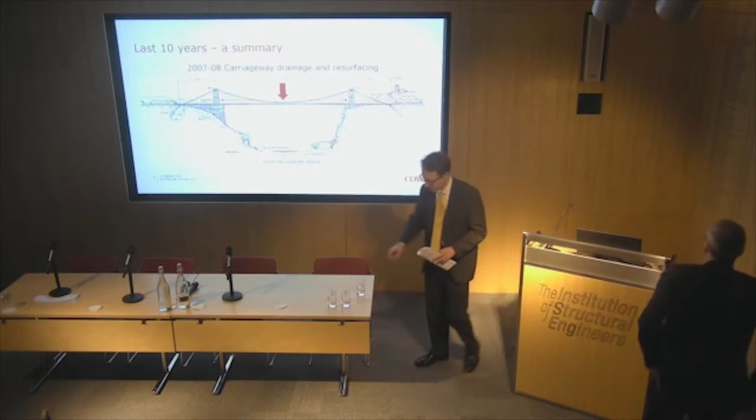Good evening. As John mentioned, there's probably many things I could talk about on this bridge because I've been involved with it for just over 10 years now. But the presentation tonight is going to focus on some of the bigger planned maintenance projects that have taken place on the structure in the last 10 years.

The first one I want to introduce is carriageway drainage and resurfacing, and that was done on site in 2008.

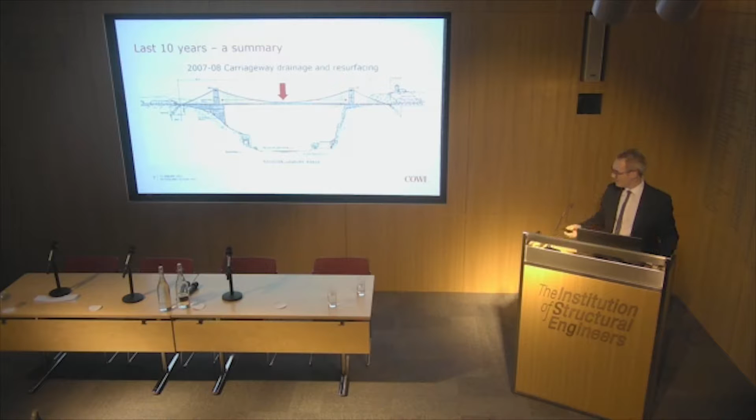But before I delve into the detail, I just want to give you a quick introduction to the deck. This is a cross-section of the bridge deck, so you're familiar with some of the terms I'll be referring to.

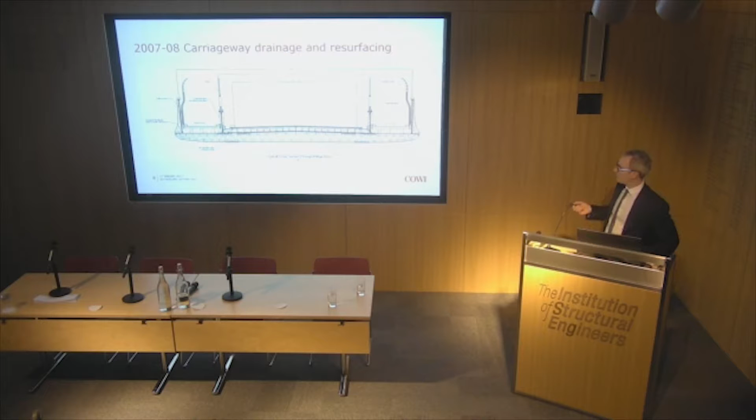Here you can see the vertical hangers, I'll try and point them out. They're connected at their upper end to the main chains, and at their lower end to the top of the longitudinal girders, and there are 2 of them there. The lower end of the longitudinal girder is bolted to this lattice cross girder, and on the outer edges of the cross girder you can see these lattice parapet girders, which have cast iron stanchions here to provide some lateral restraint.

Now the carriageway deck is made up of 5-inch thick Douglas fir timbers which span longitudinally, and on top of that you have 2-inch thick Douglas fir planks nailed in a transverse direction. The carriageway running surface is a mastic asphalt consisting of a paving layer on top of a thin waterproofing layer. The vast majority of all the structural elements on the bridge are still the original wrought iron, although some hangers and connector plates have been replaced in steel over the last few decades.

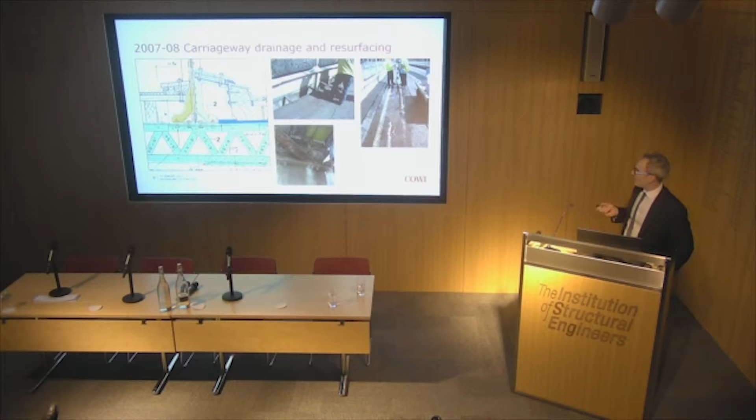So the main focus of this project was to either repair or replace some of the badly corroded sections, also to replace that curb and splashboard detail with a more waterproof or watertight alternative, and also to renew all the surfacing on the carriageway.

The photographs here show some of the metalwork repairs in progress. I want to point out this - this is where the plan bracing comes in and connects to the cross girder. What has been removed here is the connection plate that attaches and connects the cross bracing.

We were replacing that because we could see there was significant corrosion at the top of it - it lost probably 50% of its cross section. When we removed the plate, we discovered there was actually a significant amount of corrosion to the underside as well, because dirt was getting trapped in the voids underneath the plate and was causing it to corrode from underneath. That was probably another 25% section loss, so the plate was very thin in places.

They were all replaced, but that did trigger the question: is this happening somewhere else? Is there corrosion happening to surfaces which are hidden from view? So that's something we have kept in mind. There are similar details on the bridge, but most of them, pretty much all of them, are not exposed to this level of irregular wetting.

Put up these photographs just to give you a bit more of a view into the construction of the deck. This is where we reconstructed the bridge deck at both ends where the movement joints are positioned, because of the rot and corrosion I mentioned. You can see the main timbers there and the plan bracing. That's the underbridge gantry underneath, which provided a very useful platform for the works, and you can see the men installing the new timbers.

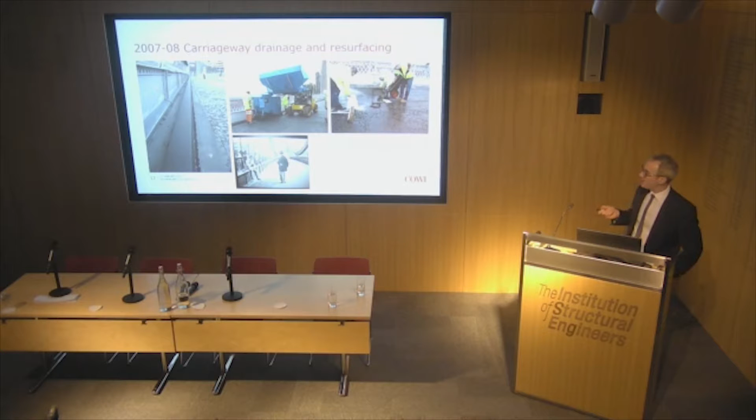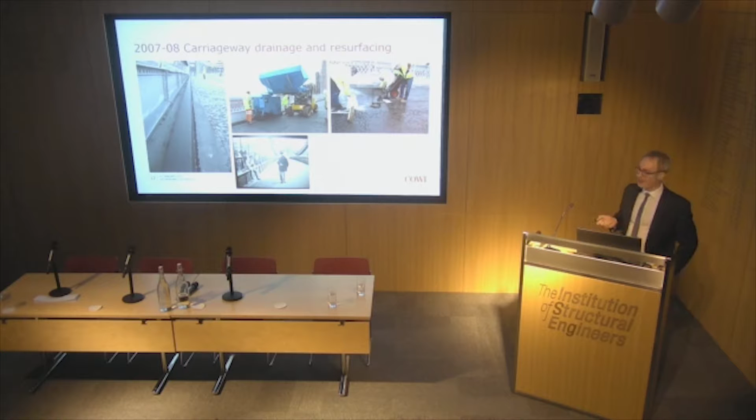This photograph shows the final detail. It's nothing overwhelming, but it's a linear drainage channel that runs the full length of the bridge. There are openings in the curb which allow water to drain from the carriageway into the channel, and this overhang, bonded to the web, diverts any spray from the carriageway. We've hopefully created a relatively watertight detail which protects and preserves the wrought iron below. The detail is actually very similar to what was installed when the bridge first opened, except they had a copper drainage channel — we've put in a glass fibre composite instead.

Just wanted to point this out — I find this a bit of an amusing photograph, just the scale of the bucket and the JCB telehandler. The reason is the 4-ton weight restriction on the bridge. Usually that telehandler would be a 22-ton version, but this one is a 4-ton version, carrying a partially filled bucket to feed the hopper laying the extruded asphalt curb. By coming up with that arrangement with the contractor, we managed to comply with weight restrictions.

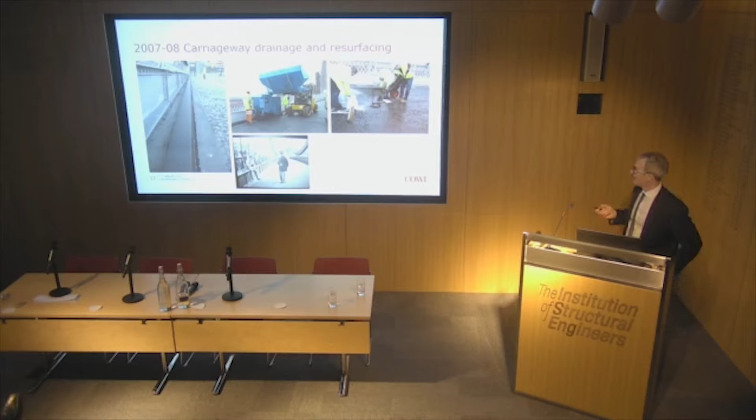So now that we had improved the waterproofing of the bridge deck, we were able to move on to some of the underdeck painting — of all the cross girders, plan bracings, and some of the parapet girders — which commenced last year. As part of that work we are raising the footpaths. They're lifted in 16-foot sections and put onto temporary supports, doing half the bridge at a time so only one footpath is closed to the public. That started last year on one half and will continue this year on the second half.

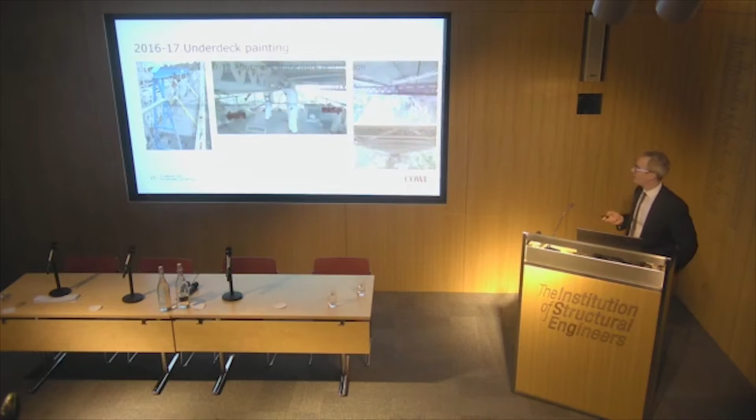The next few projects involve a lot of masonry, and there is a lot of masonry on Clifton — you can't help but notice it, it's quite imposing. That's the abutments, made of red sandstone, and the towers, largely pennant stone with some Bath stone plinths and pillars at the top, which support the cast iron parapets.

This started in 2010, phased over 3 years. The phasing was largely to put it into manageable chunks — there's a lot of masonry to cover, and we were looking to involve specialist masonry conservationists. It was broken into manageable chunks of just over 1,000 meters squared per annum.

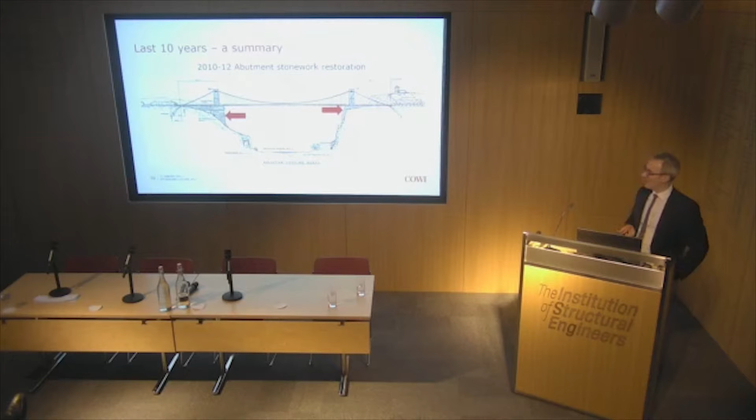The main driver was that significant maintenance of the abutments and towers hadn't been undertaken for quite a few decades, and inspections had identified areas that needed attention that couldn't really be put off much longer. Also, the last time major repointing works were done, they used cement mortars throughout, which started to have an impact on the softer red sandstone.

Of course, the bridge, being in its perched elevation, isn't the easiest to access — there was no ground-bearing scaffolding here. So it was a combination of cantilevered scaffolding from the footways, not so much that it impeded pedestrian flow across the bridge, and gallows brackets made up and secured to the abutment, from which the scaffolding could be constructed. In this photo, the gallows brackets are about this level, so you can see that much above and that much below hung from it, all installed with rope access technicians. It's a very substantial part of the works.

I should just acknowledge the involvement of Ferguson Mann Architects, who are the specialist conservation consultant. They're based in Bristol and have had an involvement with the bridge dating back quite a few years.

Much of the stonework conservation was what you'd expect: high pressure steam cleaning, removal of thousands of meters of cement pointing and repointing with lime mortars, all approved under heritage approval, and removal of large calcite build-up. This is a mason putting a tool finish to a masonry block which was going to replace something similar, though it mightn't be that actual location.

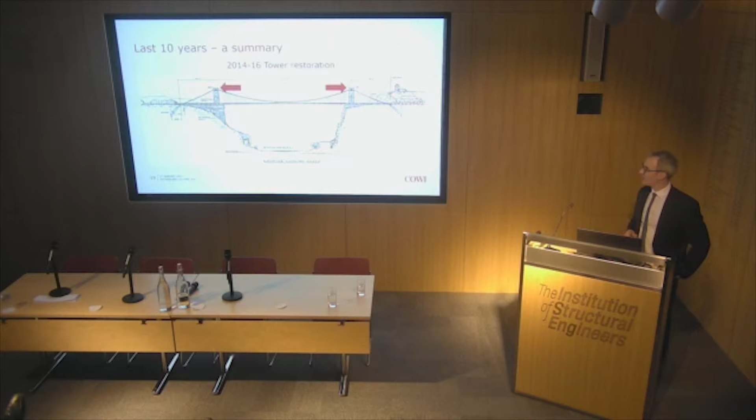The refurbishment also involved repainting of the cast iron parapets, which are very distinct to the bridge. There was quite a bit of refurbishment to the drainage system in the tower, a lot of access improvements, and waterproofing to platforms. All of that was done to the towers.

Just one item I wanted to talk a little more about on the towers: the Bath stone pillars, which you can see towards the top of the tower, support the cast iron parapets at the top. You can see the writing there, which is very prominent when you view the bridge.

These Bath stone pillars suffered a lot in terms of cracking, and we found records dating back to 1920 reporting the same problems - joints opening up, cracks appearing, and they were sending people up to repoint. We did some investigations and concluded it was corrosion of the embedded ironwork that was the cause, very obvious. This is one of the culprits we removed during the works, and we installed an impressed current cathodic protection system, designed and installed by Rowan Technologies.

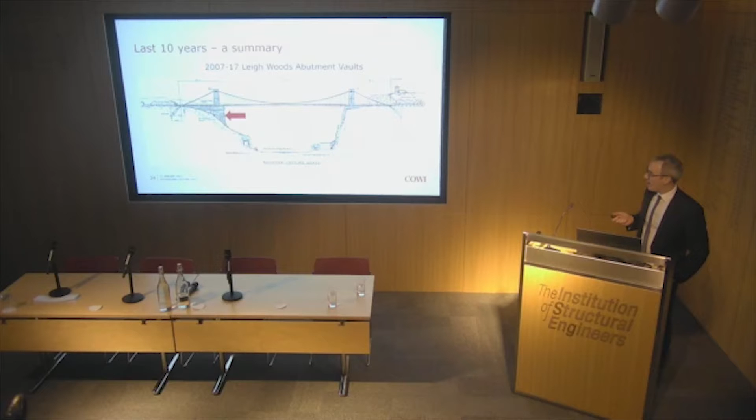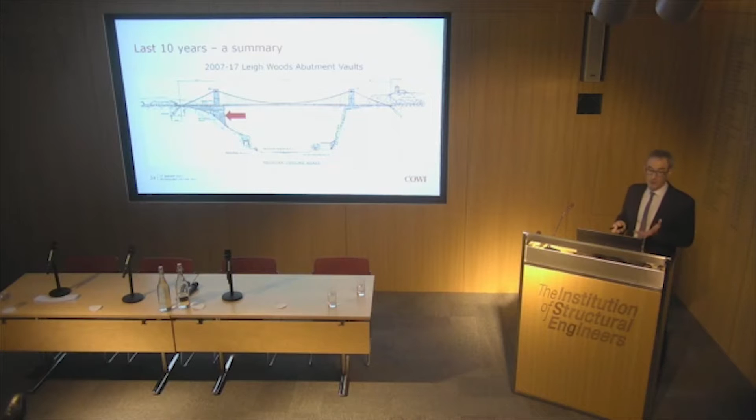In 2001 the Trust commissioned a number of core drillings through the abutment structure, and also a significant amount of ground penetrating radar, to try and establish the makeup of the Leigh Woods abutment, because there are no record drawings - nothing exists of this abutment. They finished in 2001 and concluded, quite unfortunately, that it was solid.

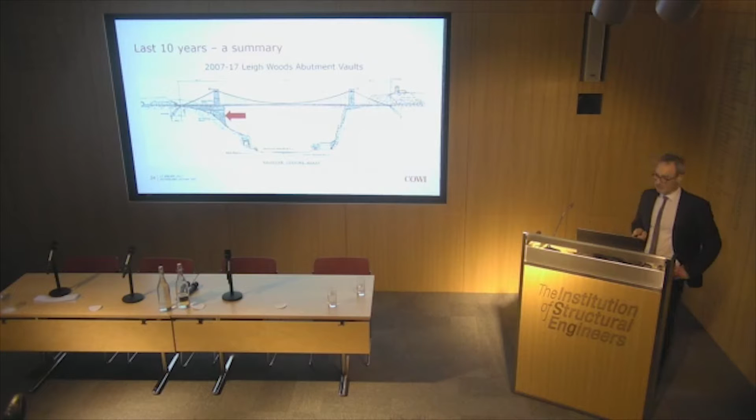Now the ink had barely dried on the report when the Trust were also doing some repaving work at the footway level around the base of the tower and discovered quite a deep vertical shaft. What followed from there was an abutment full of voids.

You can see in the sketch here there are 12 vaults, 7 in the upper level, 5 in the lower level. I acknowledge Bill Harvey's involvement in this - he has been involved in inspection of all the vaults since access has been provided. Providing access has actually been the focus primarily for the last 10 years, because it's still difficult access.

A door has been installed in this position, but many of the vaults are still confined space entry. It was only in the last year that access to these four lower corner vaults was achieved, using a technique of vacuum excavation which managed to clear all the rubble that the construction team decided to dump into the tunnels linking into a lot of those lower shafts. It was finally cleared, making way for Bill and his son Hamish to crawl through the tunnels and carry out an inspection, which they've only just done in recent months.

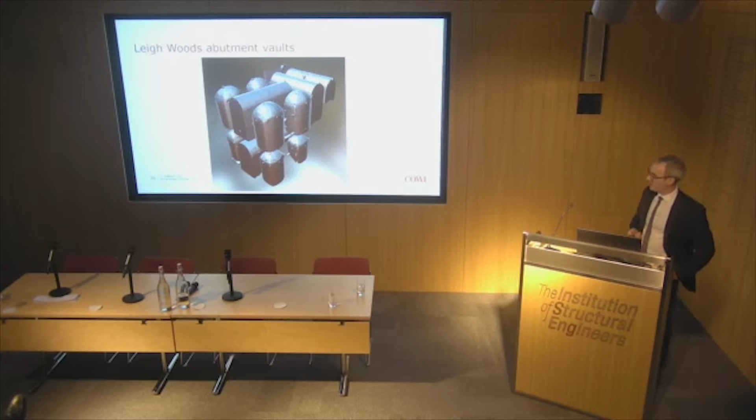They also undertook a point cloud survey, so now we've got very detailed information about the makeup of the vaults, as well as a lot of photographic information that assists with the assessments. No doubt Bill will give more detail on that in future presentations.

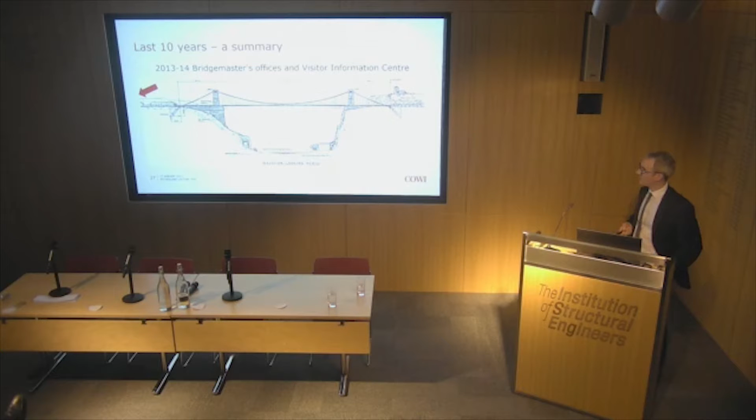As John mentioned earlier, one of the main goals of the trustees is to provide information for visitors to the bridge. In 2014, to mark the 150-year anniversary, this visitor information centre opened, sited in the bridge maintenance compound. It's an absolutely excellent facility with lots of information and great posters, and I'd highly recommend you visit and spend some time there the next time you're in Bristol.

And with that, I'll hand back to my colleague, John.

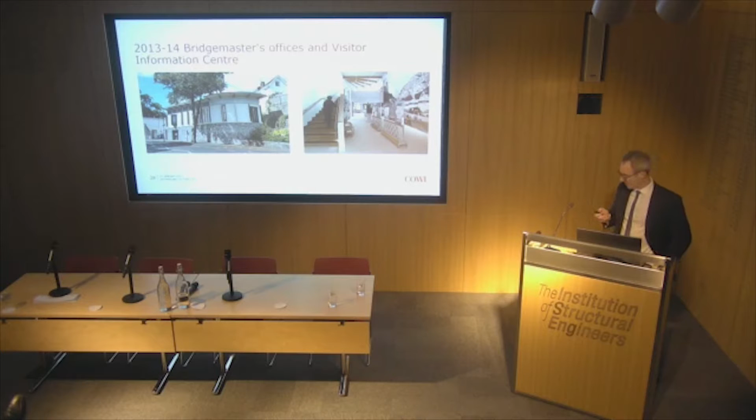Any better if I talk closer like that? Yes, no? Okay, I'll speak up as well.

So the next few slides are going to cover an item that very definitely wasn't planned. On a Saturday afternoon in April 2009, a member of the public found this, a broken hanger, close to mid-span on the north side.

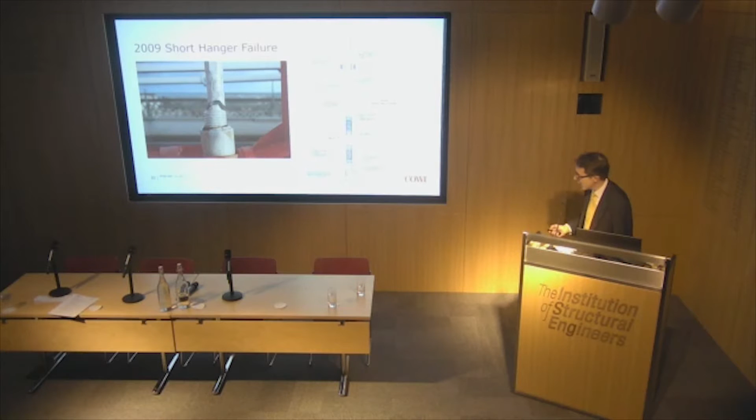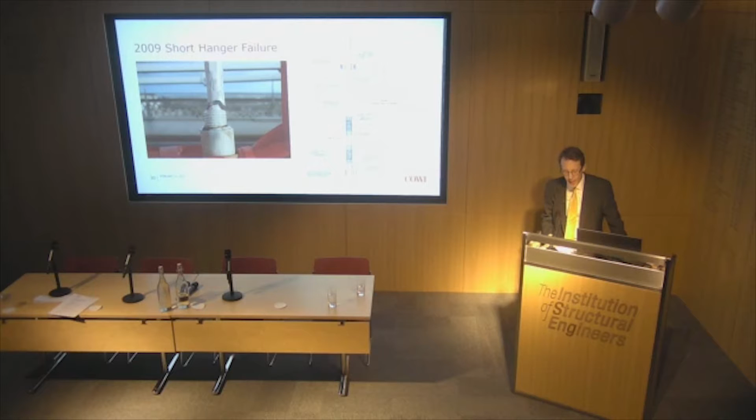Now the hangers connect the longitudinal girder of the deck to the chains above. Each hanger consists of a pinned connection at the bottom through an eye, to a bottle screw that provides some adjustment on length, then a solid rod up to another pinned connection at the top. At the time of the failure, almost every hanger on the bridge was original and made from wrought iron, designed to work as simple pinned tension elements.

Thankfully, Howard Humphreys had established that the bridge could sustain loss of one hanger with a pair of 2.5-ton axles on the cross girder adjacent to the failed hanger, but with no factor of safety remaining. So the first thing we did was to cut a temporary hanger from a piece of S355 steel and put it in quickly. It enabled us to reopen the bridge, remove the traffic management, and then sit back and think.

So why did it happen? Well, the deck has a small hog to its profile. And as the sketch shows, if you apply asymmetric live load, it tends to flatten that profile, with the effect that the deck pushes longitudinally. So there's this relative movement between the chain and the deck, and that movement is accommodated by rotation of the hangers. And of course the rotation is greatest where the hangers are shortest.

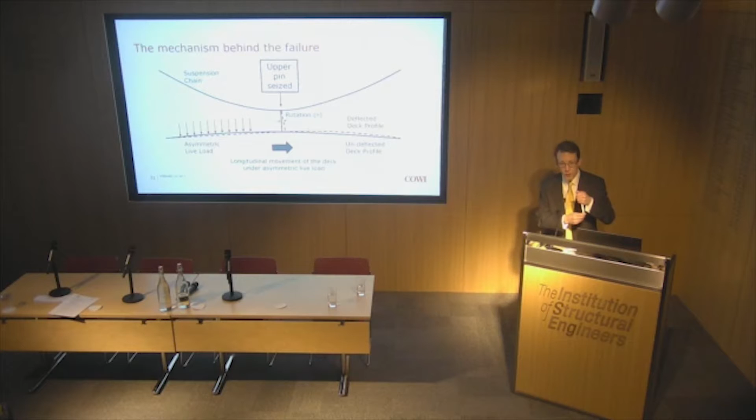But our upper pin seized in the failed hanger. So a hanger that was supposed to rotate was now clamped at the top, and that attempt for the deck to move resulted in bending and fatigue.

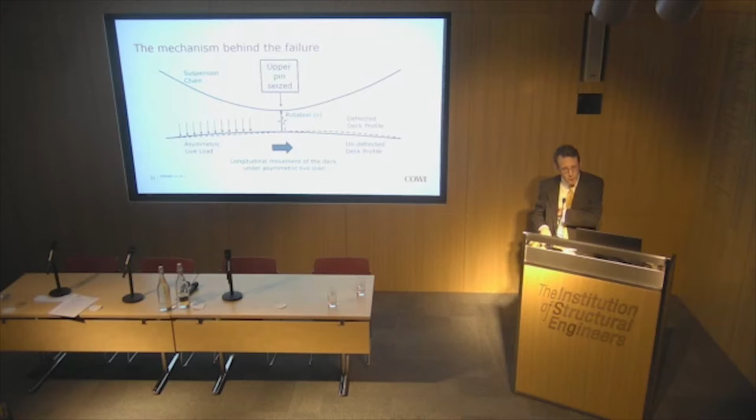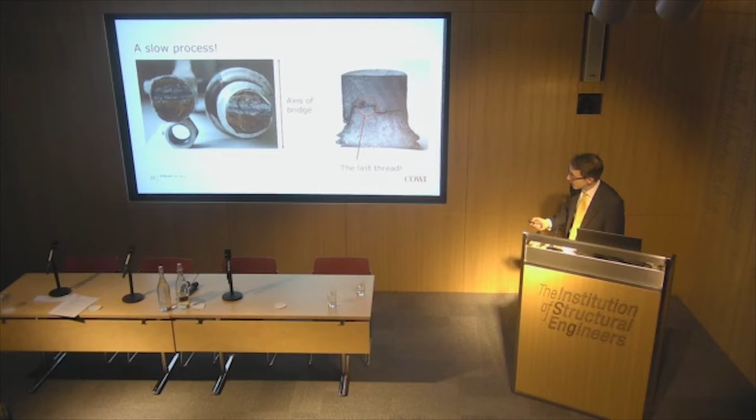So as a result of the failure, we learned something about the bridge's actual behaviour, not its designed intent. The photograph on your right was taken 2 days after the failure, and you can see the grey region is literally the last thread, the amount of metal that wasn't quite enough to hold the dead load in the hangar, the tension in the hanger. But you'll also notice that the fatigue surfaces are corroded, and this is because this fatigue failure took a very long time to happen.

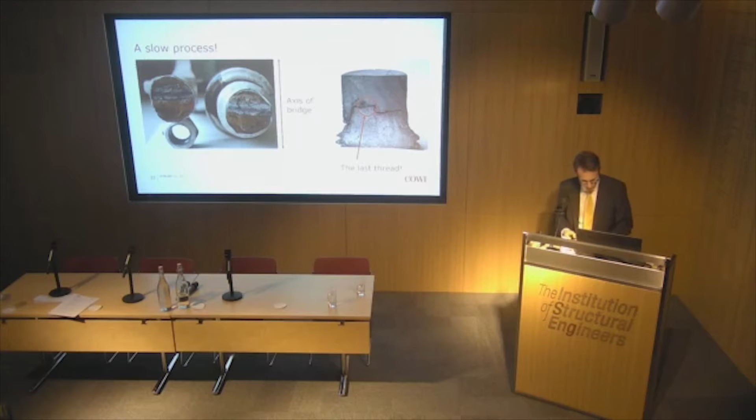So having restored structural support, we decided we should look at all of the other hangers. Remember, they were all original and all wrought iron.

One of the key appointments we made was an appropriately experienced NDT practitioner. And what do I mean by appropriately experienced? Well, this individual, Paul Sutherland, understood the material. If you carry out magnetic particle inspection on wrought iron, you will get a lot of indications, and to a less experienced practitioner, they would look like cracks. They're not, they're simply characteristics of the material. So he had the unenviable task of differentiating between a characteristic and a true defect.

So inspection of the hangers proceeded on the basis of perceived vulnerability. All the hangers have the same criticality, so we looked at the threads and changes of section on the middle third hangers, the ones we expected to rotate the most first. Then the upper and lower connections of the hangers in the middle third, the body of the hangers in the middle third, big focus on the middle third, and then we moved out and looked at the remaining hangers.

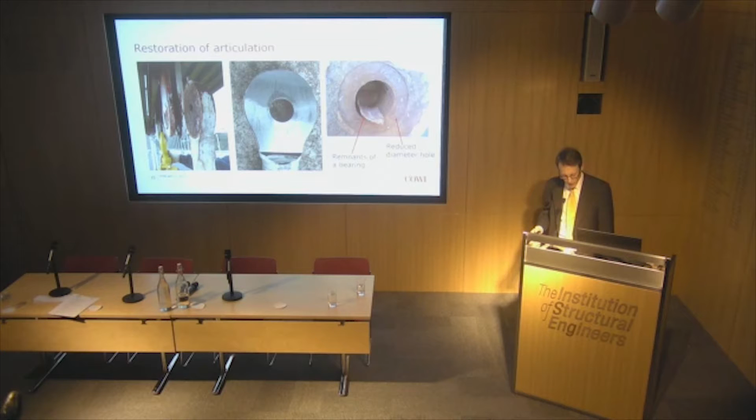As a result of this failure, we are now very much better at record keeping. We've invested a lot of time and money in a strategy for ease of access for future generations. And I think it's fair to say that this will be very much Alf Perry's legacy for the bridge.

I should add that we refurbished 7 out of the 162 hangers, and we replaced a further 10. I'll apologise to the purists because we replaced 10 hangers with steel versions. But we took an enormous amount of care to replicate the geometry and the details of the original wrought iron versions.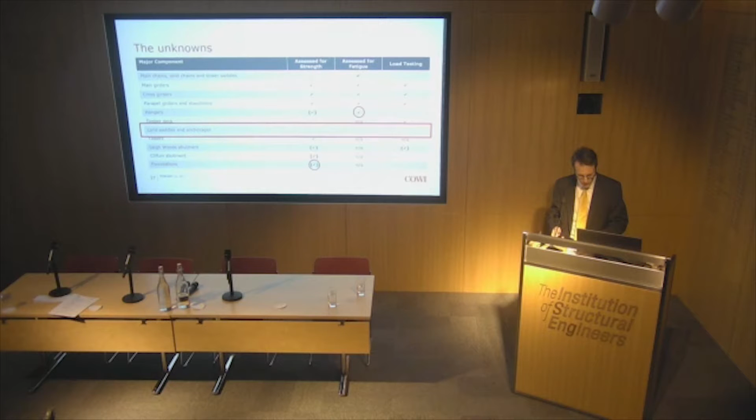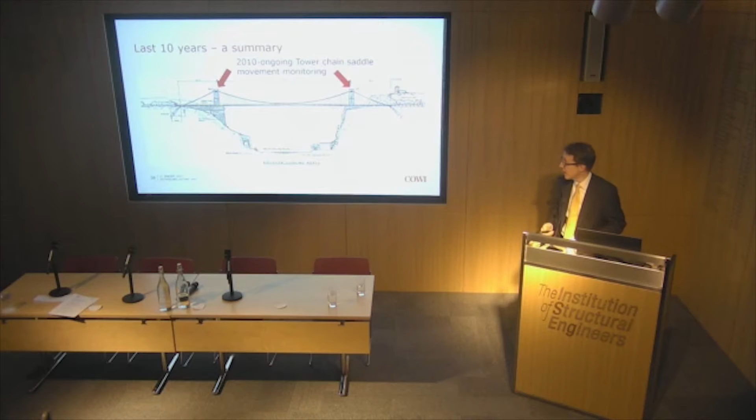But having had a failure through loss of articulation, our immediate thought was, well, where else could we lose articulation and how significant could it be? And the obvious place is, of course, the saddles at the top of the towers.

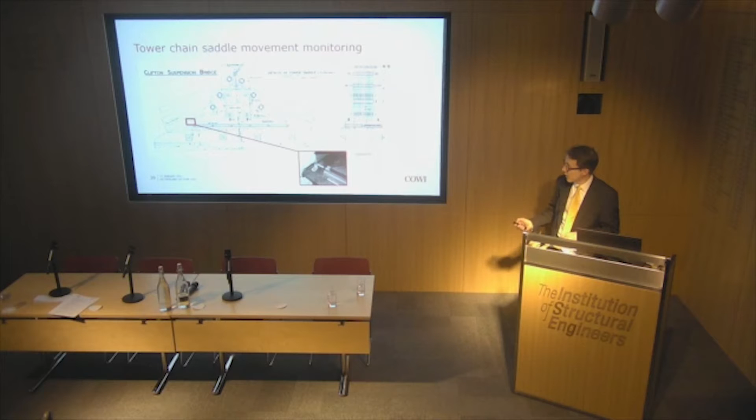So this is the arrangement. The chains come in from the main span and the land span, as it's called, and they sit on a bed of rollers which should allow free movement from left to right, so that the horizontal component of the tension in the main span and the land span balance.

After the hanger failed, we installed instrumentation on all four to confirm that they're moving and to continue to confirm that they're moving. And I'm pleased to report that they do. One of them drags its heels a little bit, but for the most part they behave.

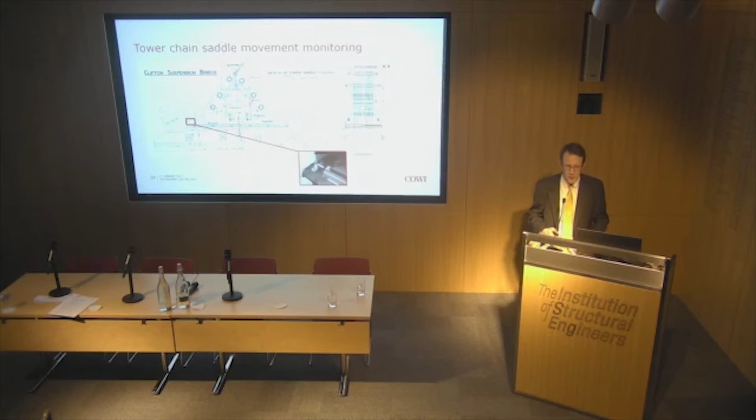We've stepped up the inspection and maintenance requirements for the saddles, recognising their importance. They've been cleaned. Here's Aegon inspecting them by endoscope. And the photograph on the left shows the rollers with the keeper plate removed, but once that is put back in place, there is now a perspex cover to prevent debris getting in and hindering the articulation.

So what would the consequence be of a seized saddle? This figure just illustrates the point. So we have the main chain span on one side of the saddle and the land chain side on the other, which is fixed at the land saddle. And the rollers allow freedom of movement, so these horizontal forces balance on either side.

But you'll notice I've drawn the roller on an inclined plane. That's exaggerated. It's actually at a slope of 1 to 31. But it means that there's a relatively constant horizontal load on the towers trying to push them into the Clifton Gorge. I'm going to refer to this as load case 1, and Bob will pick up on the significance of that in a moment.

But this is the doomsday scenario: that the saddles seize. And all of a sudden, any changes in the main span due to live load, or more importantly, changes in the back span due to temperature, expansion and contraction of the land chain, bring the stiffness of the tower and the stiffness of the foundations into play, and the potential for generation of very large horizontal forces.

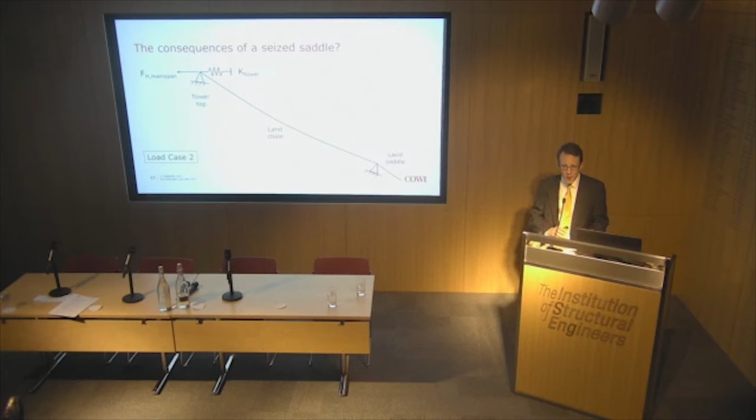And at this point, with the link between the structure and the foundations, I'd like to pass over to Bob to talk about the work that he's done over the past 10 years.

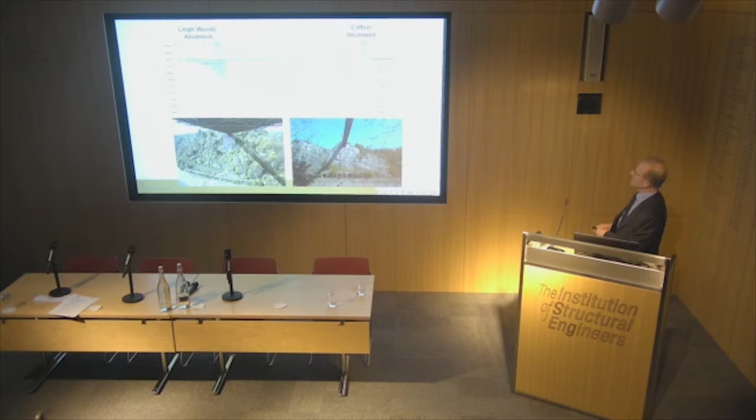So the question is whether or not the compromise to increase the perceived safety of the suspension structure compromised adversely the stability and the stability reserve of the foundations and the slopes beneath them.

In plan, you can see that the Clifton abutment is actually constructed on a promontory with a slope to the north, the north slope, and the main gorge face, the south-west facing slope. And to the south, a west-facing slope with a relatively subdued slope profile.

The underlying geology is Carboniferous limestone, the Clifton Down limestone. It's a sedimentary sequence laid down in layers, and the layers include interludes of what's called argillaceous material, or clayey material, and you can see this forms prominent bedding partings which are very persistent throughout the slope width.

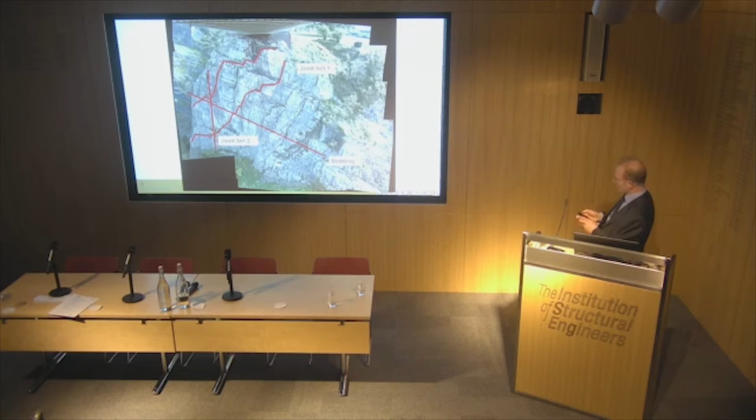There's an example. There's also through-going subvertical structure, and you can see the trailing edge of a joint set that trends perpendicular to the bridge, and this subdivides the rock mass into a series of slices perpendicular to the bridge. In addition, there is a third set, more or less parallel to the bridge, joint set 2. So there are three sets of through-going joints or discontinuities that subdivide the structure of the rock.

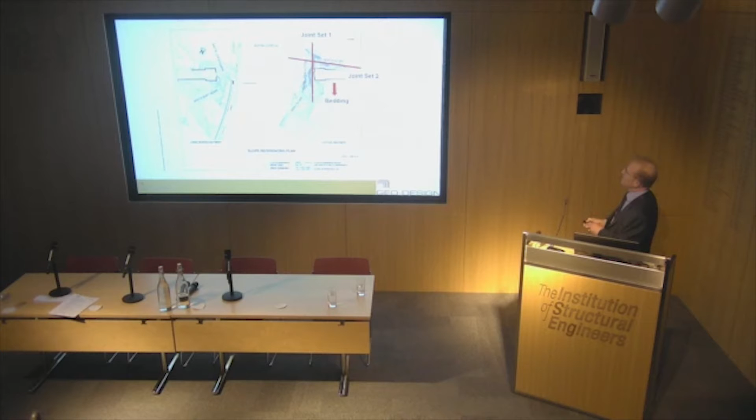It's no coincidence that the main subvertical structures are parallel to the main slopes forming this promontory, with the bedding dipping towards the south at about 30 degrees.

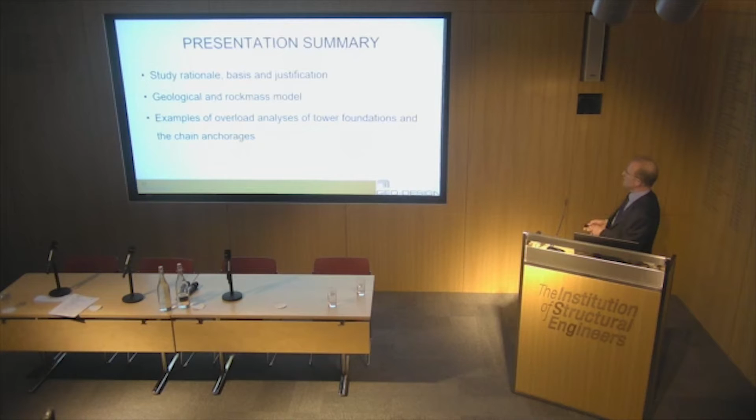So after that short overview, the structure of the talk will be initially visiting the rationale and the basis or the justification of why the technical committee of the trustees, and particularly ALF, felt it necessary to commission this assignment. And then I'll describe the geological and rock mass models that we developed as a basis for subsequent overload analyses to establish the stability reserve in the foundations and the chain anchorages.

It's worth pondering for just a minute on what gave Brunel the confidence to position the abutment quite so close to the top of this tall, steep rock face. It may be that he shared the prevailing view of the time, that rocks were divine creations, and what was there now would always be there. And that was reasonable - the first geological map of Britain had only just been produced, and when construction started, this was more than 100 years before soil mechanics, rock mechanics, engineering geology, and the general practice of geotechnical engineering had started. And maybe he was right, because no movement has been detected in the abutments at Leigh Woods or Clifton.

But that's not the case for the slopes to the north and south of both abutments. Starting to the south of the Clifton abutment, Clifton here with the high rock face, you can see immediately to the south, the rock face has gone. In the past, the slope has failed or degraded by some mechanism. There has been some quarrying since, but overall the slope has failed and gone.

And then when we come a little bit further south, the rock face is back. In the 1960s, Dr. Henkel was invited to come to site and to investigate why the portal structure of the Clifton Rocks Railway, which is in tunnel up to the hotel at the top, had moved out by about 100 millimetres. He worked out that the overall movement was out into the gorge, and that the main culprit was an underlying clay layer that formed the basal surface for the movement.

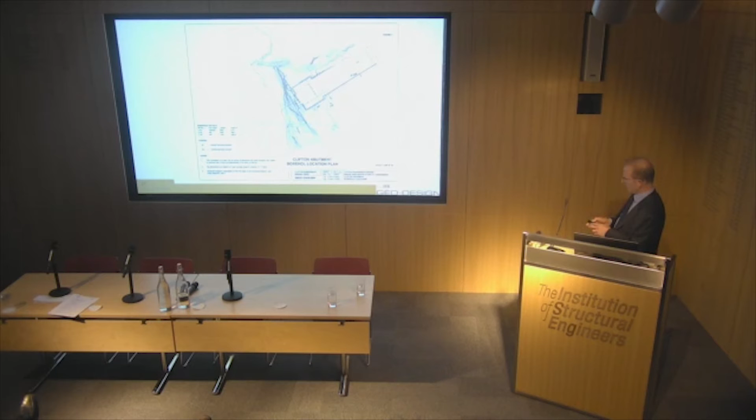We then undertook a borehole investigation with three boreholes at each abutment, orientated to intersect each of the through-going discontinuity sets. This one, for example, parallel to the alignment below Clifton, intersecting the through-going joint set 1 structures. We did the same at Leigh Woods.

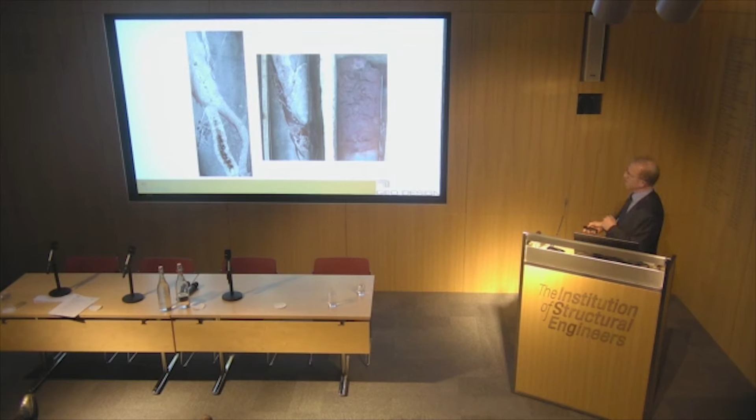We found that, not surprisingly, within each joint set there was a huge variety of joint types, from very strong healed structures through to mudstone and clay infilled structures. So we produced a classification for both the bedding and the subvertical structure, varying from limestone contacts all the way through to clay layers, and assigned each discontinuity recorded and recovered in the core to one of those classifications. That allowed us to produce these strip logs.

This example here is recording the clay layers. Based on the sequence, and particularly the clay layers, we were able to establish a correlation between the boreholes, and between the boreholes and outcrop, in a three-dimensional interpretation. We did the same at Leigh Woods.

We were able to establish a correlation of this detailed sequence across the gorge, and by some remarkable coincidence, at the centre line, the base of the abutments are located at almost exactly the same height above the same bed E.

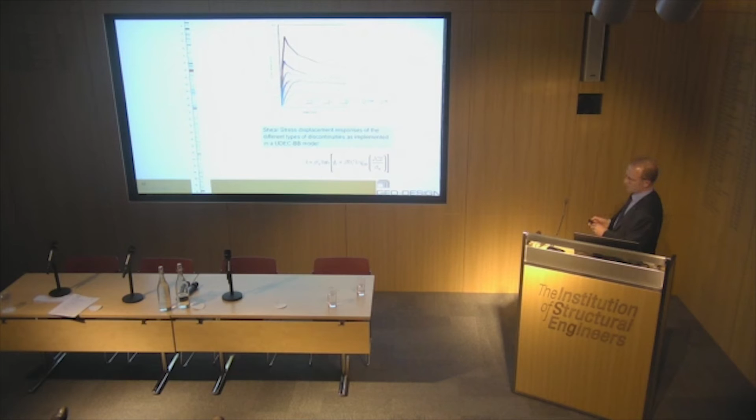We also gathered physical data for each discontinuity type, particularly joint roughness and joint wall strength, and used the Barton-Bandis failure criteria to develop a shear stress-displacement relationship for each discontinuity type—you can see the very weak compliant clay layers versus the very stiff limestone contacts. This Barton-Bandis model was used within the numerical analysis that followed, and we verified it with a whole array of laboratory tests on the discontinuity types.

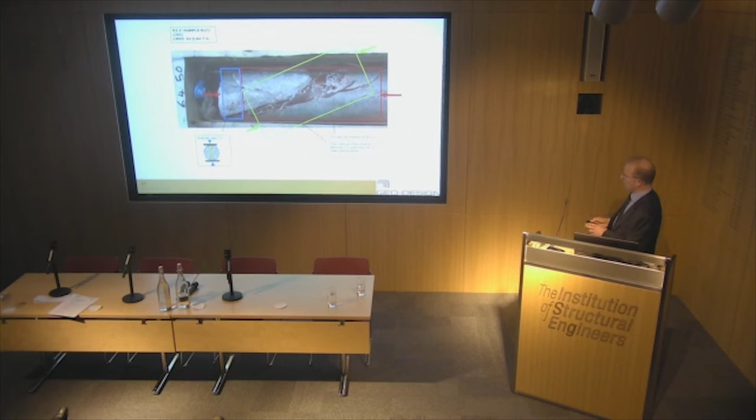So we ended up with a model, still in AutoCAD, of all the discontinuity types, the through-going structure, fully characterized with their geotechnical properties.

Looking at the same model in long section, we found the distribution of joint types, particularly for joint set 1, was not uniform—there was a concentration of clay-filled joints, you can see a prominent red one there, and several others, within what we called the central abutment zone. This coincided with a natural valley feature that the abutment had been built up from. We then had an outer abutment zone and a rearward abutment zone.

This formed the model taken directly into our numerical analysis called UDEC, a distinct element model whereby blocks of rock are free to rotate or fall, restricted only by the shear strength of the discontinuities around them and the forces applied. We did the same for Leigh Woods.

There were a number of failure mechanisms we considered. I won't describe them all—we'll focus here on the main gorge face and a particular mechanism, either toppling or buckling. There was a whole raft of other mechanisms associated with the west slope and the adversely dipping bedding in this direction, which essentially encompasses the Henkel problem.

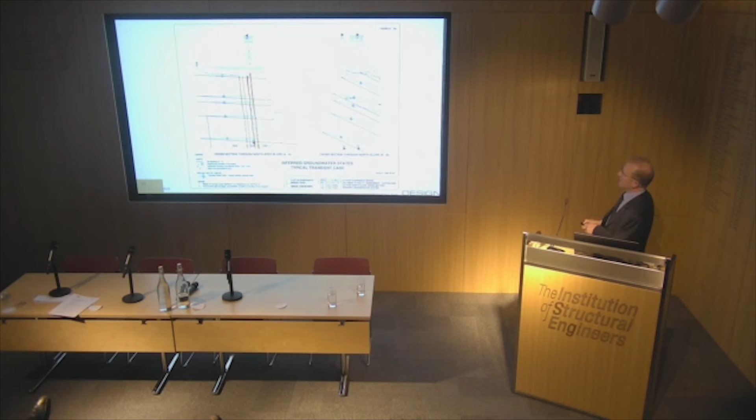We applied groundwater pressures within the model, run under effective stress, and the groundwater here is compartmentalized based on our observations in boreholes and outcrop—perched on the clay layers and confined, so it doesn't drain into the gorge slope, confined by the vertical aquiclude, if you like, of the central abutment zone.

We applied the two load cases, LC1 and LC2, with the locked saddles as John outlined, and ran the model. Initially we run it without the gorge excavated so it consolidates and in situ stress is established. We then excavate the gorge, build the bridge, apply the loads, and allow it to run.

This is the LC1 case, the standard bridge loadings, and you can see the highest movements were at the top, reducing with depth. This movement was accommodated by shear displacement along the joint set 1 structure.

If you go back to the analogy of a row of books on a bookshelf—if you push those books, the only way to get movement is if you have shear displacement between the books. That's a classic topple failure, and that's what this was showing.

We then began to test this to establish a stability reserve, and we first looked at upper bound and lower bound geotechnical properties, and we got a very uniform distribution in the displacements.

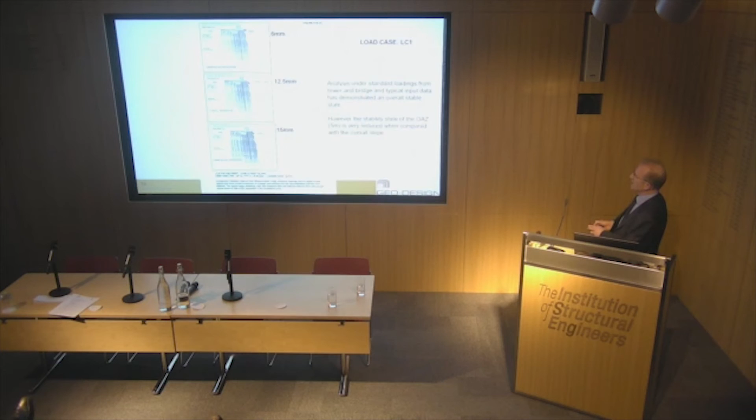However, when we began to look at the distribution of load, the maximum principal stress plotted here underneath the tower with this load case, we realised that the outer abutment zone, shown here in the blues and light greens, was essentially de-stressed through lack of confinement and was unable to carry any load, throwing it back inwards. Meanwhile, the central abutment zone, with all its weak compliant structures, was also deforming and throwing the load forwards into this narrow rib of rock, only about 5 metres wide, which is carrying the lion's share of the load from the tower.

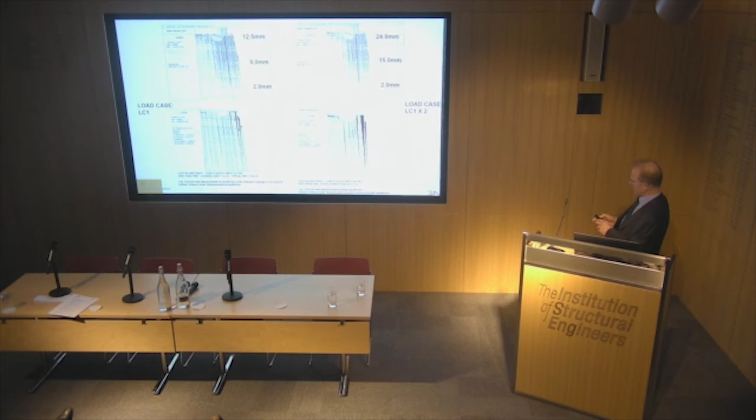So we tested it further, we doubled the loads, so this is LC1 times 2, and you can see remarkably that the displacement more or less doubled, which gave us confidence that the model equilibrated and didn't fail, and that we were establishing a reasonable factor of safety.

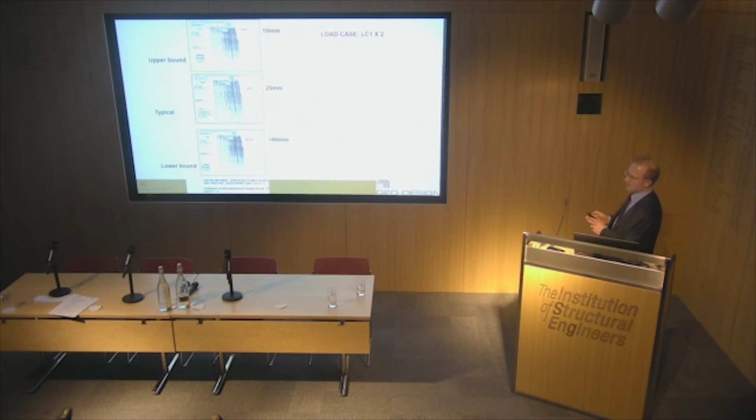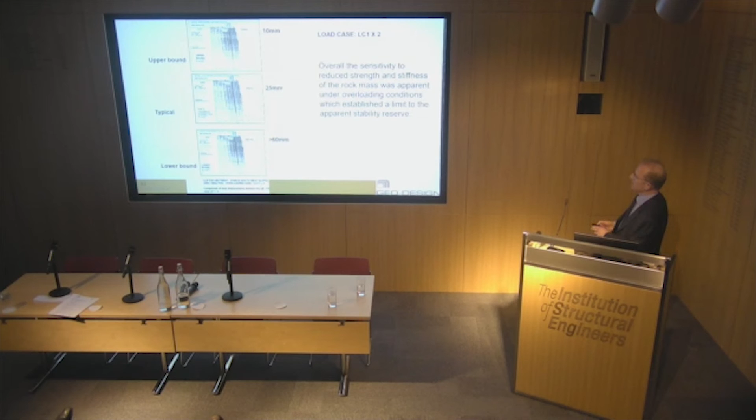We then combined the LC1 times 2 with upper and lower bound, and with the lower bound load case, the model didn't equilibrate, it fell over after about 60 millimetres of movement. But it gave us still some appreciation of the limits of stability under this particular mechanism. Under the LC2 case, the model failed immediately.

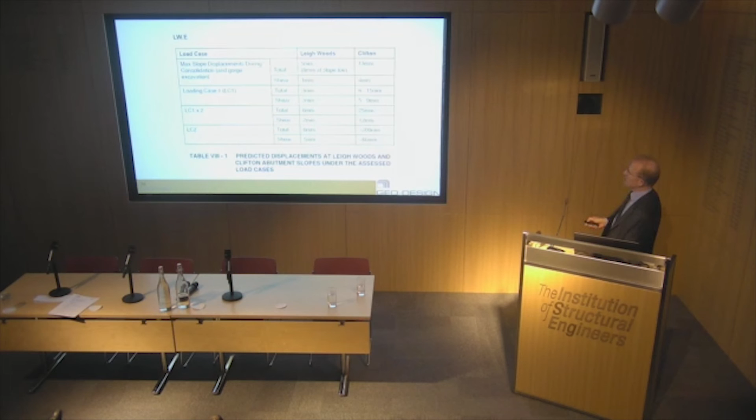We did the same for Leigh Woods, allowing us to do a comparison with the same load cases between Leigh Woods and Clifton, and this gave us some assurance that we weren't exaggerating things at Clifton and hadn't underestimated geotechnical properties, because even for the LC2 case, Leigh Woods had very little movement at all.

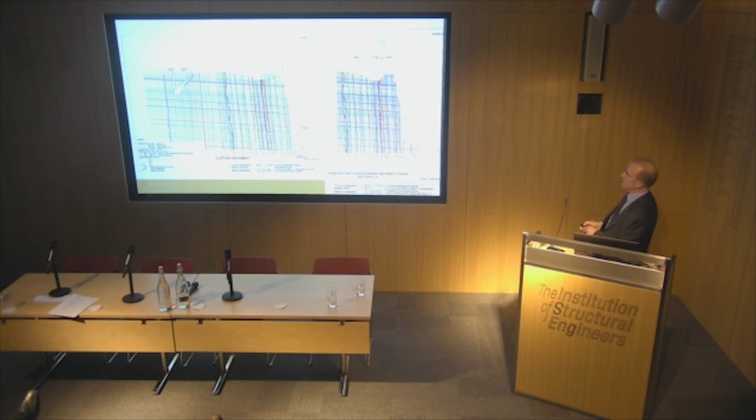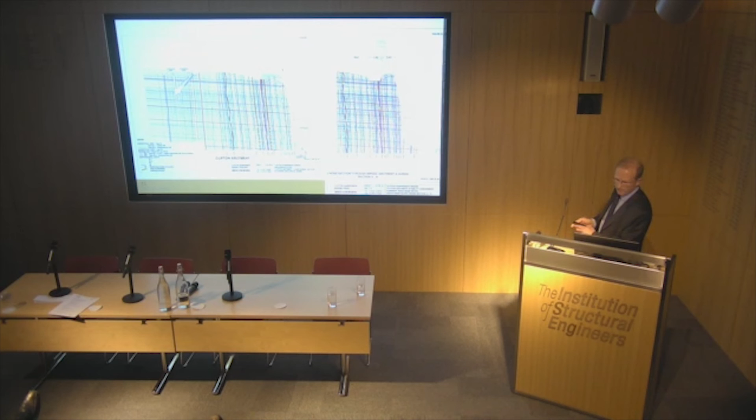Also at this point, which was January 2016, we were asked to consider the capacity of the anchorages, and I'm now going to briefly outline where we've got to with that.

So the land chains coming down from the tower are connected to a land saddle. The land saddle is founded on a cast iron plate directly on the ground, and the anchorage chains are connected there from the saddle down into the anchorage tunnel, which is about 20 metres long, and they're fixed in place with a Staffordshire brick plug, and fastened with cast iron anchor plates and webs.

Because of this deviation in the cable angle, there is a large force directed into the ground, a bearing pressure underneath the saddle, and that's very good for applying confinement to the rock, because the rock strength is stress dependent and confinement is good.

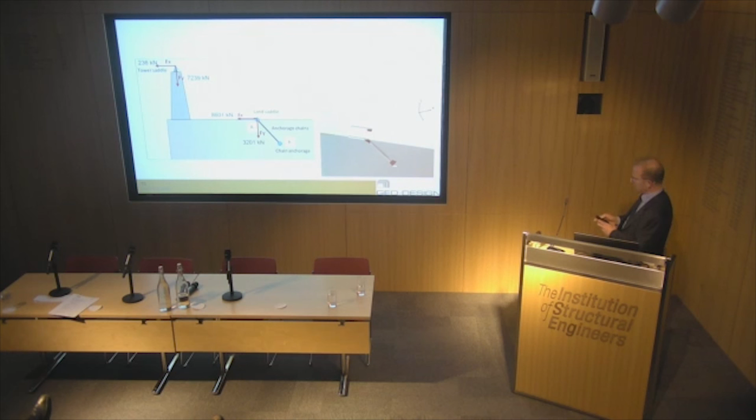So in terms of possible mechanisms of failure of the anchorages, there were 3 that we were considering. One is a joint-bounded block, joint set 2, joint set 1, and bedding underneath, that essentially would be extracted under the anchorage loads, rather like a tooth being extracted.

The next is a little more complicated, and this involves oblique sliding along the joint set 2 structure into the north slope, which is not very far away, with our bed E forming the basal surface.

And the last one was shear displacement along the subvertical joint set 2s, but offset by the joint set 1s to form this sort of sawtooth profile, which with this mechanism, if it happened, would then mean that loadings from the anchorages would be completely interactive with loads and the effects of the loads from the tower.

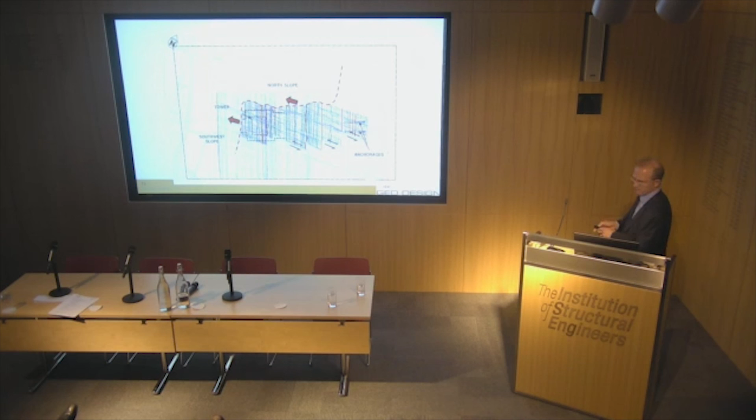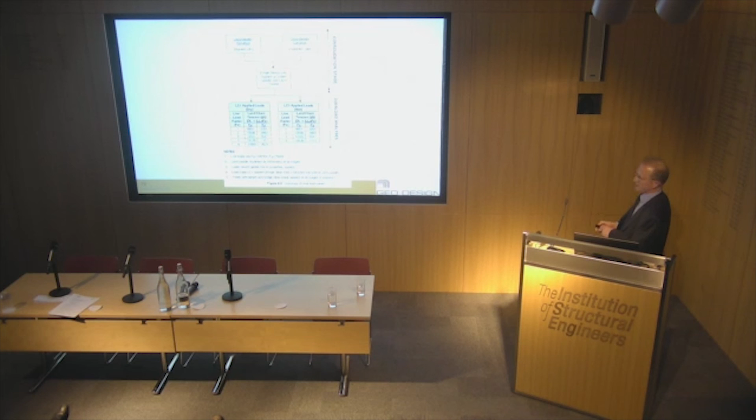We ran the 3D model in a very similar way to the UDEC model we'd seen previously, and we applied a load factor just to the live load at the land saddle, and ran the model. So this is 1, 2, 4, 6, 8 times live load at the land saddle without groundwater pressure.

This showed us that essentially we had all 3 of the mechanisms playing some part. You can see here, this is the anchorages sitting in here, and you can see this joint-bounded block, a prominent joint set 2 there, and almost all of that movement, and the movements before the model failed were very, very small, but the majority of that movement was vertical.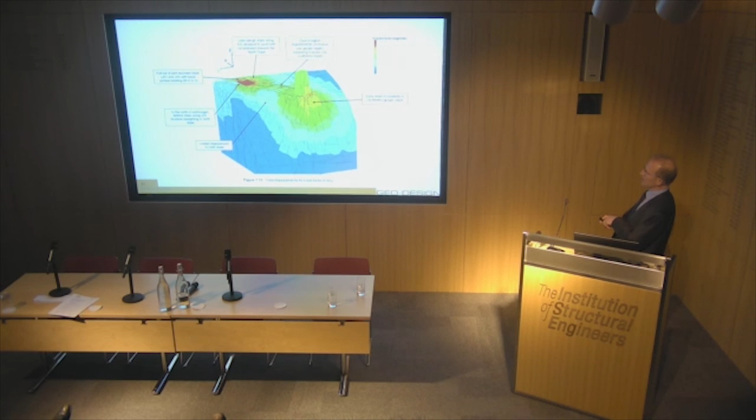But there was a small amount towards the north slope, but that didn't really develop as a failure mechanism. And it's hard to see on here, but there is a sawtooth profile which allowed the deformations to develop all the way from the anchorage to the tower and interact with the behaviour of the tower.

These are cutaway models looking from behind, and you can see the anchorage structures there. That's total displacement, and this is vertical displacement. So you can see the idea of the plug being pulled out is real in terms of the modelling, at least.

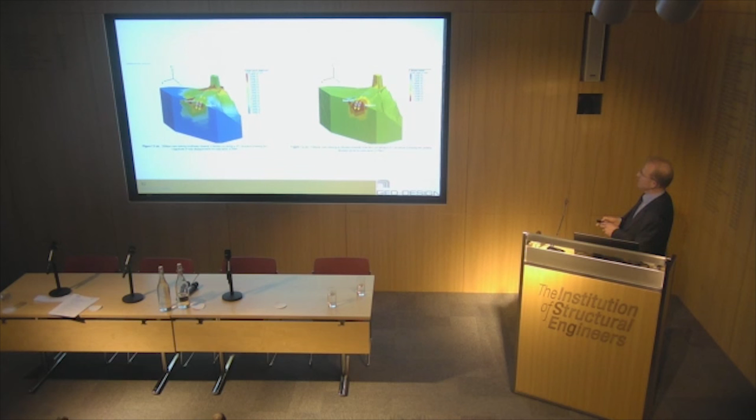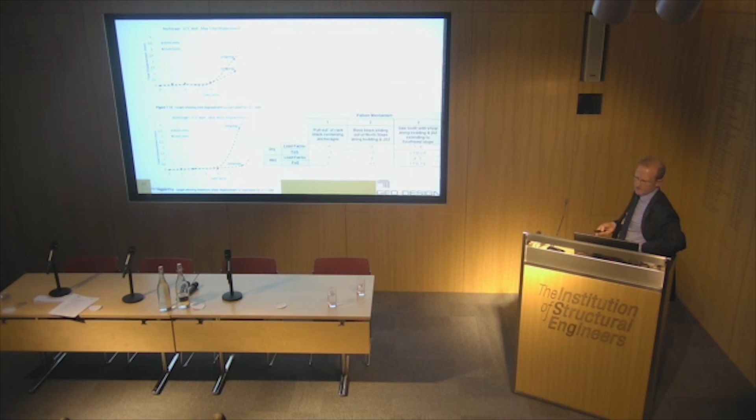Based on the results of this, we've been able to relate the loads developed for each of the failure mechanisms and establish an overall factor of safety for each. We're on the basis of concluding this at the moment, and managing to put a big tick against the stability reserve for the Clifton anchorage, at least.

We're revisiting the toppling failure because of the narrow rib with the updated model, and so we hope soon to be able to put an equally big tick against those. We've also been working our way through all the other potential mechanisms of instability, and putting ticks where we can and following up any loose ends where we need to. We've done the same for the Leigh Woods abutment, and the same for the Clifton North slope.

All the work has been independently reviewed by peer reviewers appointed directly by the trustees. Mike De Freitas has reviewed the geological and rock mass models, and Bob Pine the numerical analysis. Thank you very much, ladies and gentlemen.